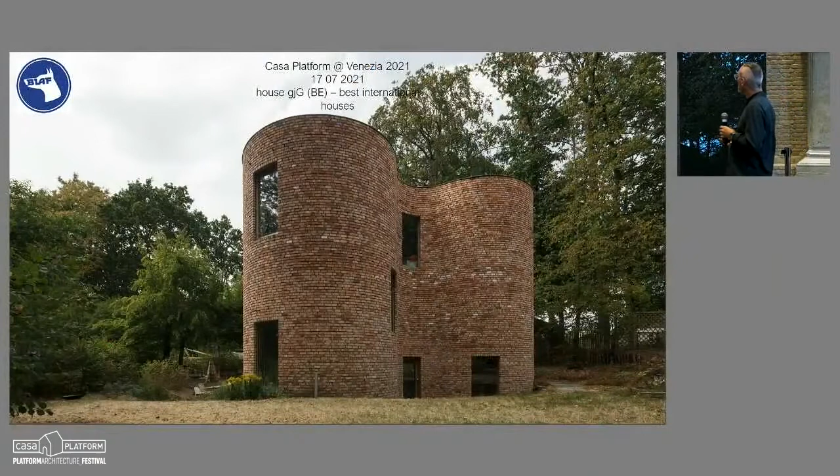The office is BLAF Architecten, which I founded about 20 years ago. BLAF is how a dog barks in Flemish. We're a studio, an architecture studio, also urban design, mostly known as pioneers in sustainability, circular design.

We are a researching and a searching practice, for being a practice of change. So this is our mission statement with a lot of commitment, research, and intuition, which leads to responsibility, innovation, and a signature.

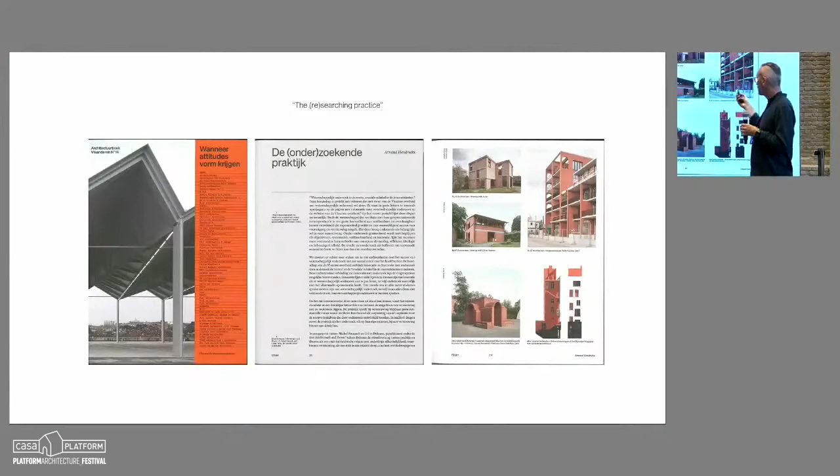I'll start some projects before the GJG house to understand it in a better way.

So some new buildings I will show you, sustainable experiments and research, a lot of geometrical forms, houses I think BLAF is known for, just because of the different ways of constructing in hybrid structures, on a small way, on a compact way.

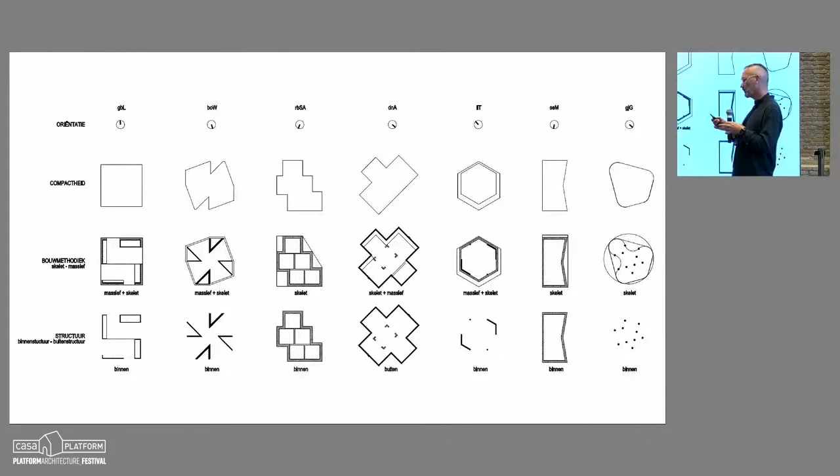So this is a house from 10 years ago, which was nominated for the Mies van der Rohe Award, our first passive house. And since then, we only build passive houses.

Outside, also passive house inside. This is the first time where we designed those kind of slates. It's commercialized by Eternit afterwards.

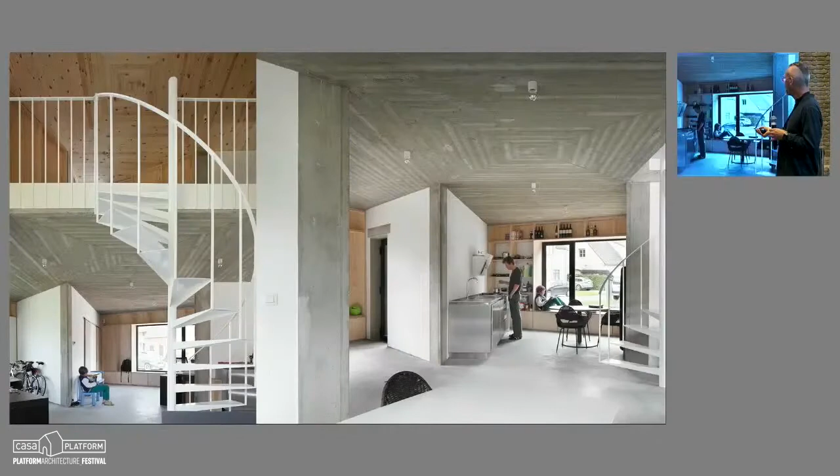The inside, outside, inside, outside, inside. So what about brick is something special, because all the passive houses were made with a really thin skin. But in Belgium, we have a lot of brick houses on the outside.

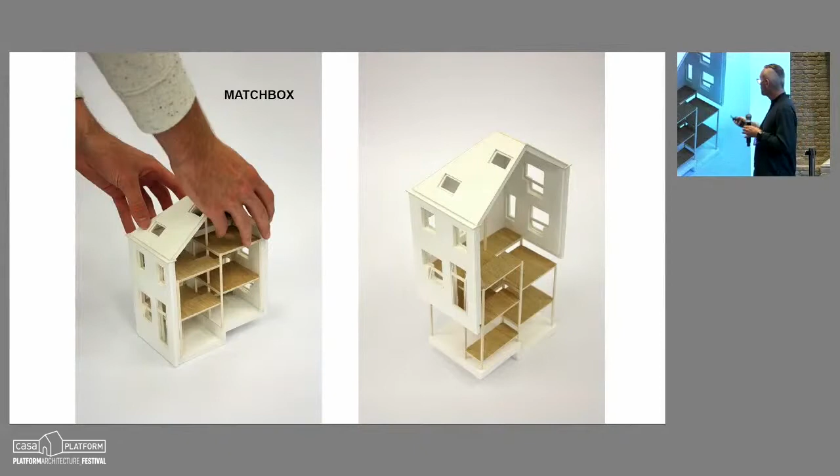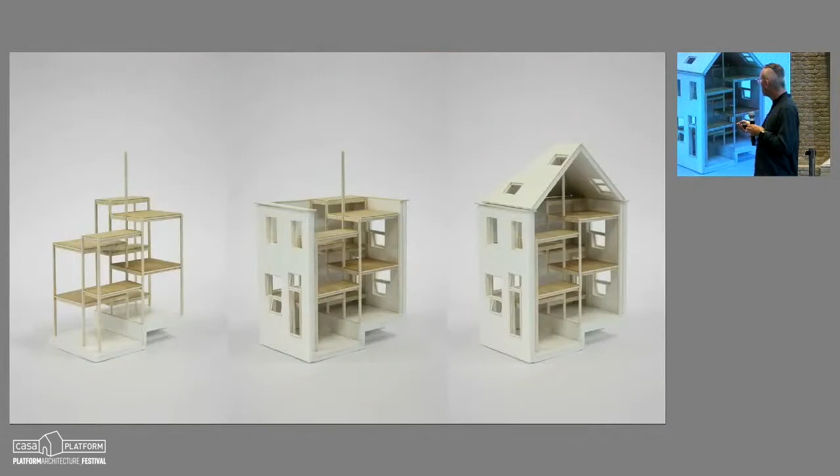So we started investigating how we can build in a hybrid way with a very light wooden structure in existing buildings, how we can make those kind of houses ready for the next 100 years.

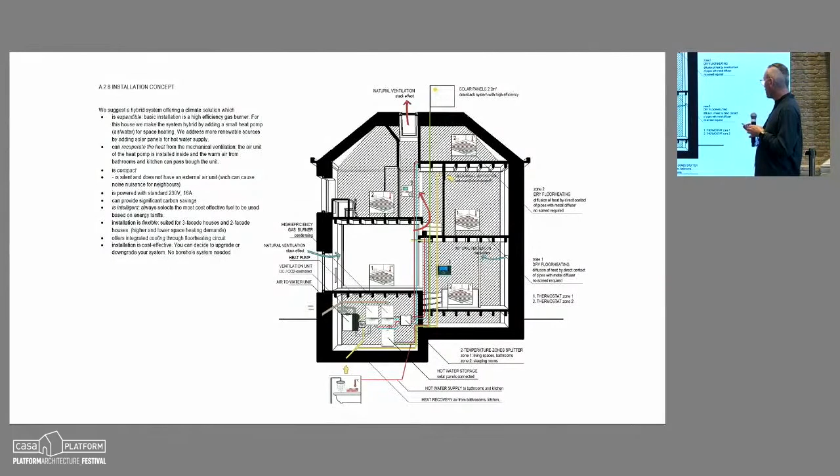There's a lot of researching with new technology in a low-tech way. So this is an example of how every house we build in a different kind of way, different ways of building a wall.

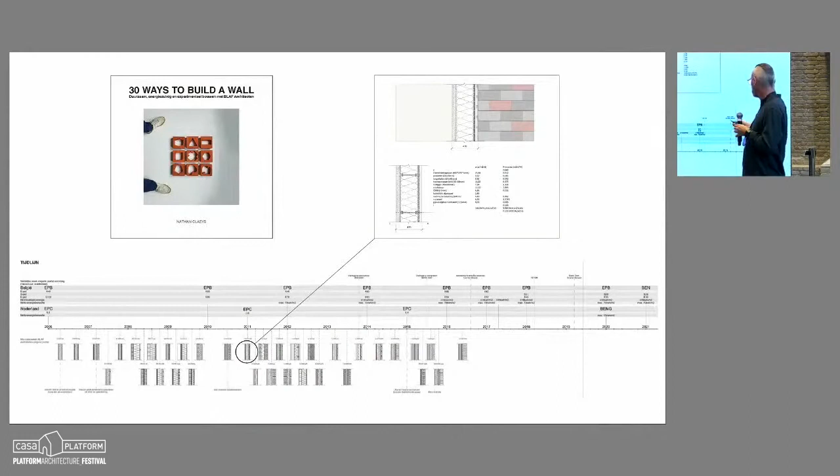So this is how we put it together in terms of years.

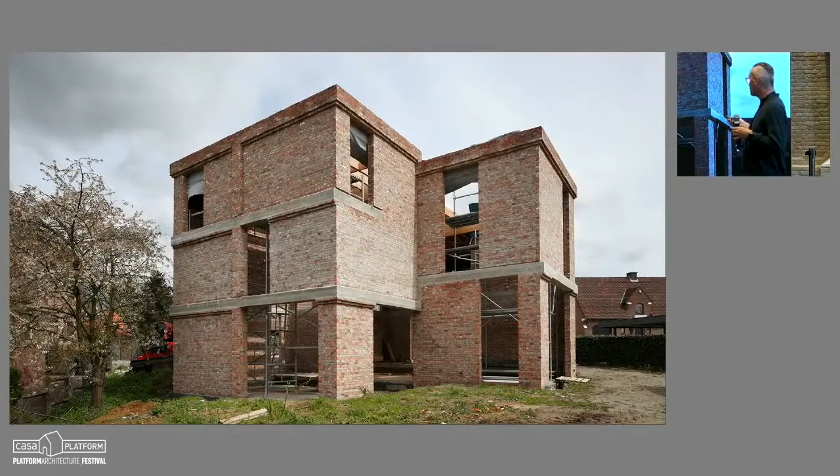And then in brick, we first started to reuse brick because there is a lot in Belgium. So we wanted to make a statement that not only in renovation, but also in new buildings, we can build in the same way.

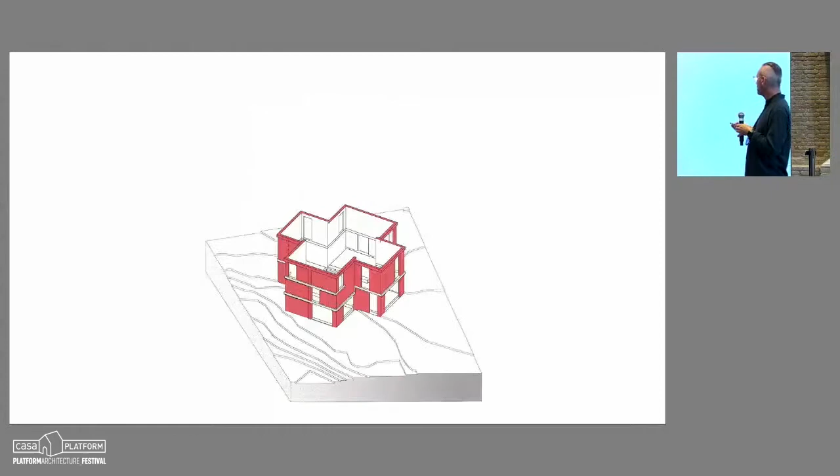So this was the first one, DNA house. We first built the wall, and then the roof, and afterwards like a decor, and in the interior, the wooden light structure.

Some other buildings with the reused brick on the outside and the wooden structure on the inside.

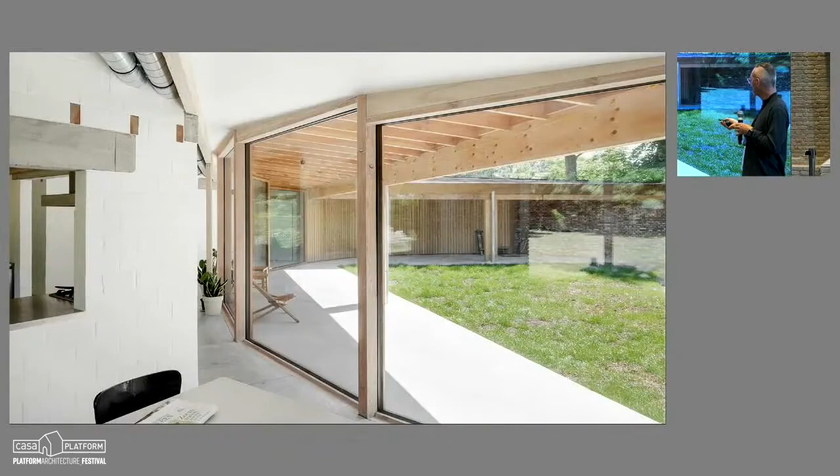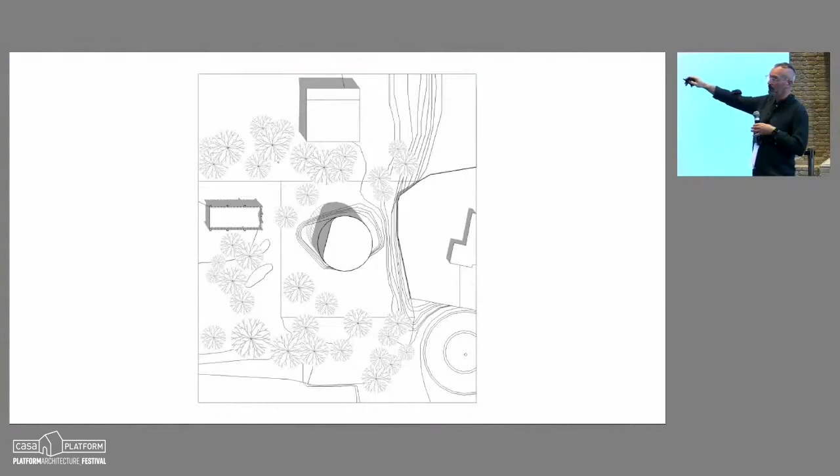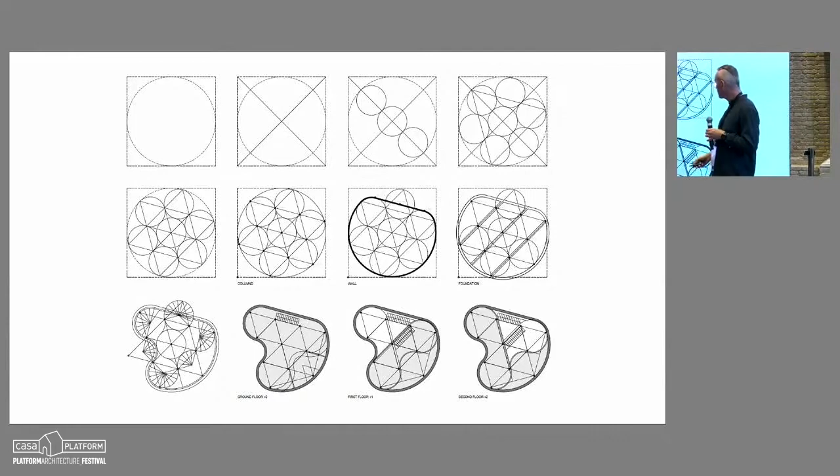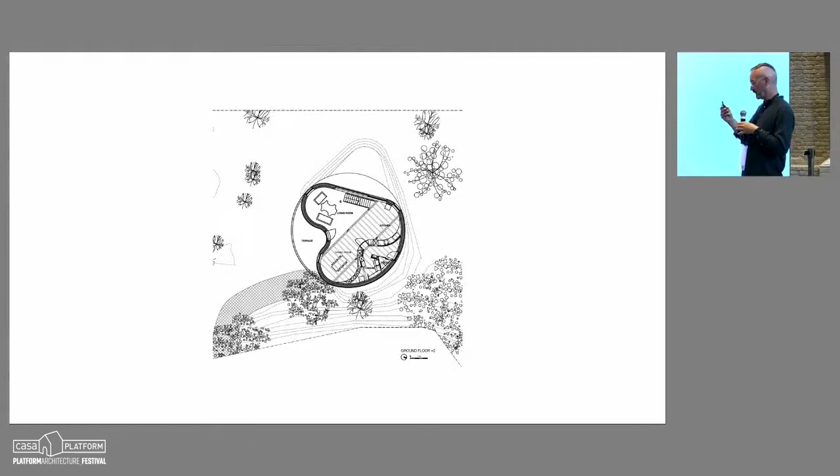That's why it became that form, because of the trees around it. And then the steel and wooden structure, a three-storey house. Also important was the brick for the acoustics from the autostrade, which is above it.

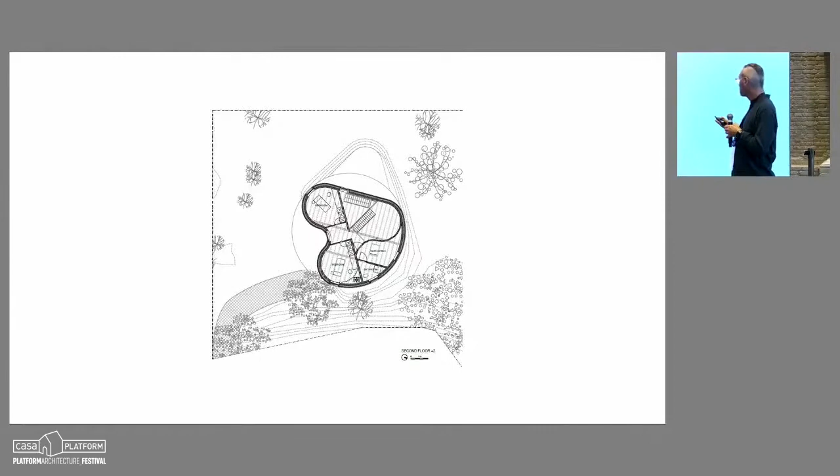And yeah, just the plans, but the pictures tell a lot. Just for the feeling, the outside and the inside is like the same.

The man of the house, he helped a lot with the steel structure himself.

Okay, so afterwards, we started to develop our own bricks, just because the curved house is also trying to become a self-bearing structure. So we are looking now for developing bricks which carry themselves, apart from the wooden inside.

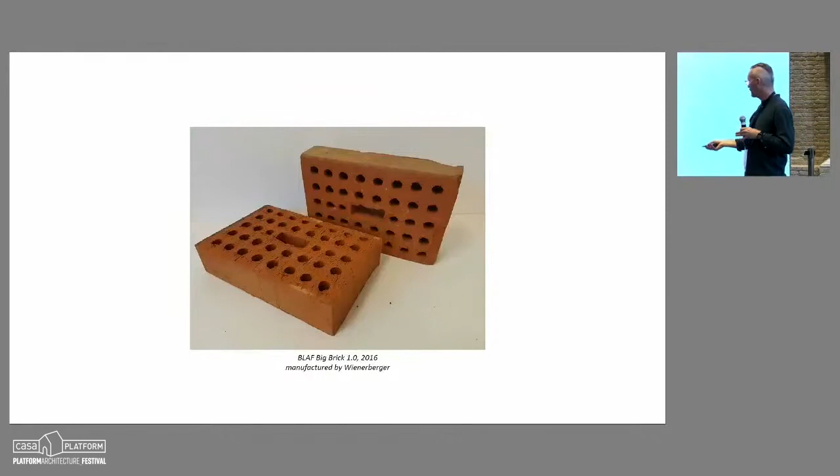So this was the first one, manufactured by Wienerberger. We designed it, it's my own house I'm living in, also with the wooden structure on the inside.

In Mechelen, a triangular house.

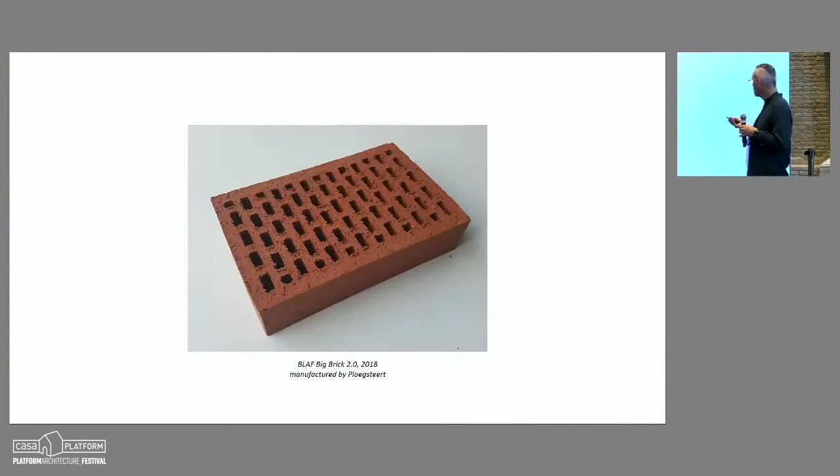And then we came to the second brick we developed right now together with Ploegsteert. And now we're making bigger projects. We did like 700 houses the last 20 years, and now we're building, I think in the next 3 to 4 years, more than 1,000 houses, but on a bigger scale.